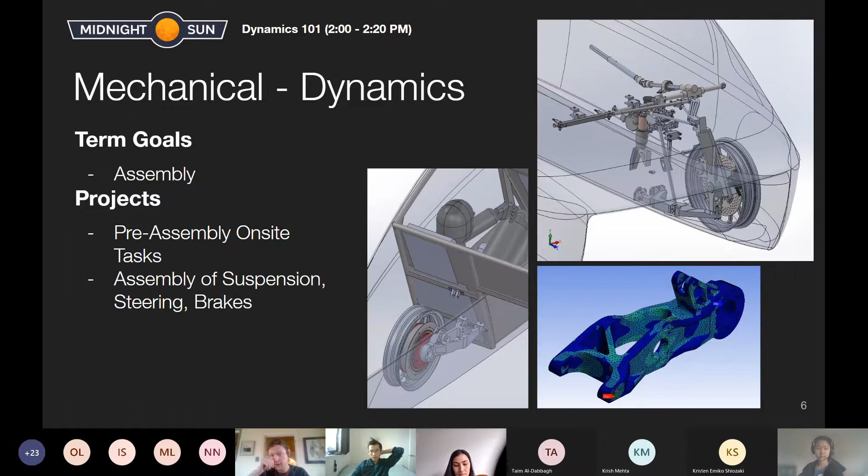I'll give a short introduction to the dynamic subsystems and what it's all about. I'll start with the suspension. The suspension of a car is just a mechanism that...

I'm not sure if it's lagging on my end. Well, I'll just keep talking and let me know if no one can understand me.

The suspension is essentially a mechanism that controls the vertical movement of the wheels. So when you're hitting bumps and stuff, you don't want all of that energy from the bump to be directly translated into the chassis and into your drivers and passengers. So you essentially have a suspension system that reduces the peak force that's exerted.

So we have springs which temporarily store energy and then re-release it, and we also have a damper which absorbs some of that energy and transfers it into heat. The spring and the damper work together to protect the drivers.

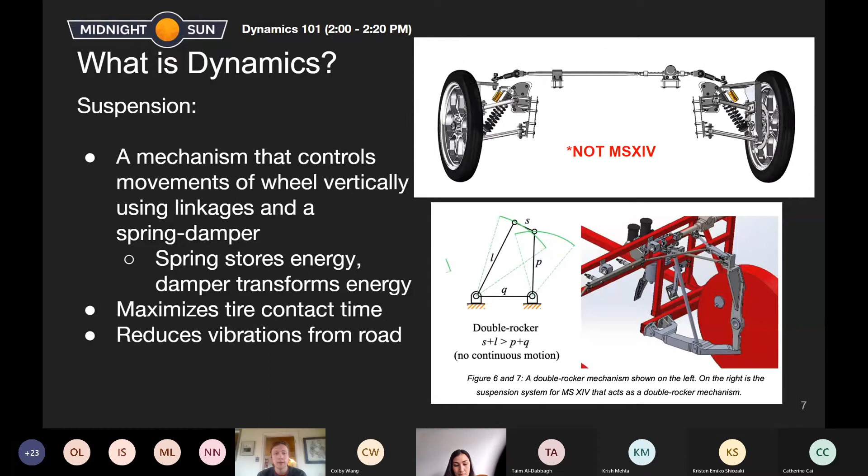Right, next slide. Once you have your suspension, which keeps the wheels on the ground, you need to be able to go where you want to go. For that, we have the steering system. Our steering system is fairly simple.

Most vehicles that you've probably driven have what's called power steering, where there's either motors or some kind of hydraulic pump assisting you to move where you want to go. We don't have any of that. So all of our steering is just based on how much force you can put into the steering wheel.

Our system - while that little animation is playing in the top right, that's not actually our vehicle, but it has quite a similar geometry in terms of the steering of our car. You can see this rack and pinion there, to the right a bit - this mechanism is essentially just converting the rotational motion of the steering wheel into linear motion, and then there's a series of linkages that connect to the wheels and turn them back and forth.

Yeah, it's fairly simple to understand in concept. In practice, getting all of the geometry right is quite difficult, and so there was a lot of work put into getting all of the angles to line up, hopefully it will assemble properly.

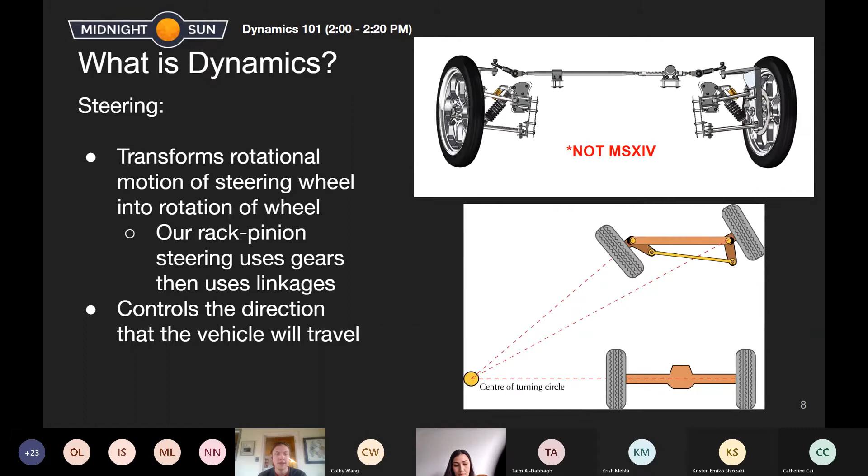And then finally, we have brakes. On our car we have two types of brakes. The main brakes for stopping the car are hydraulic. Essentially, the driver has a pedal and pushes on it, which compresses a long tube full of brake fluid. Because that fluid is incompressible, hopefully very little of the energy you put on the brake pedal goes into compressing the fluid. All of that energy gets transferred along the length of the tubing and goes all the way to your brake calipers, which are essentially just a little clamp that squeezes on a brake rotor.

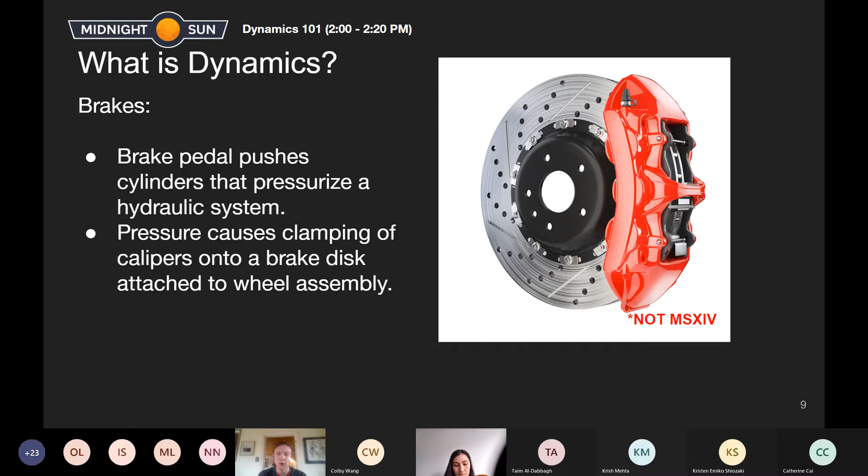This is the front suspension, and then the rear suspension is a lot simpler because you don't have any steering on the rear.

As I mentioned, we need to just finalize our plans. A lot of that is going to be in terms of making sure that the people who are on-site and ready to assemble it are very familiar with the system and how it needs to go together. And then there's also a few miscellaneous on-site tasks that need to happen before we can assemble the suspension.

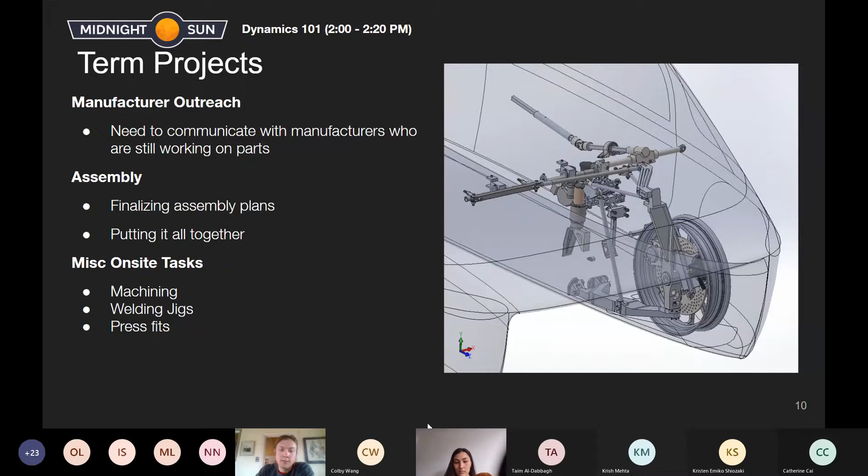And that's all for myself. I think the next slide is some of the supplier interfacing stuff. I don't think this is particularly relevant anymore to Dynamics. We still have a few relationships with companies. A large part of what we've had to do over the past couple of years is interfacing with machine shops and people able to make stuff for us and get surface finishes on parts. But a lot of that is kind of done. There will still every now and again be a few small things where we need to communicate with a company. So this is just something to keep in mind - if you're working on Dynamics, part of what you're doing may be communicating with companies, which is both a good skill for the real workforce and vital to our team.

And if you have any questions about Dynamics, feel free to ask them now.

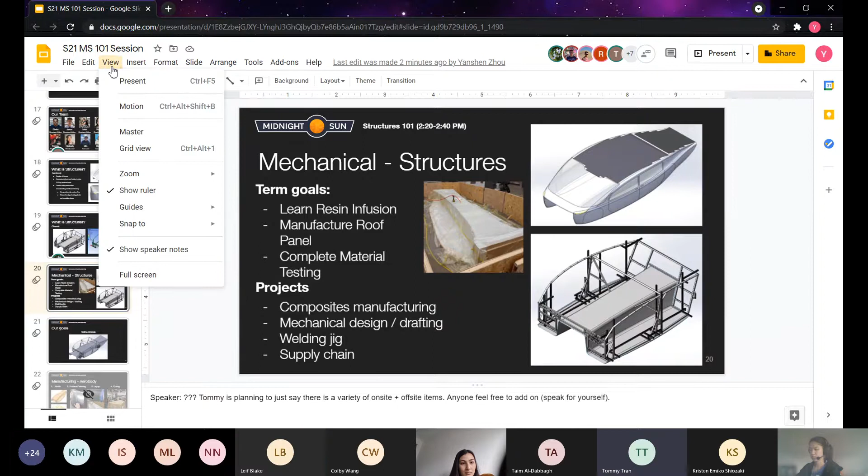Hello, my name is Tommy, and I'm the structures lead. I'm currently in 3A mechanical engineering, on my study term. Hello, I'm Kimberly, I'm the chassis lead, also in 3A Mech this term. Hello - yeah, we hear you. My name is Min, I'm in my 2B of mechatronics, and I'm the current aero body lead. Hi, I'm Michael, I'm the assistant aero body lead, I just finished my 1B nanotech eng, and I'm on co-op right now. And then we also have Catherine, who has spoken previously, but she's the project manager for structures also. I guess you can go to the next slide.

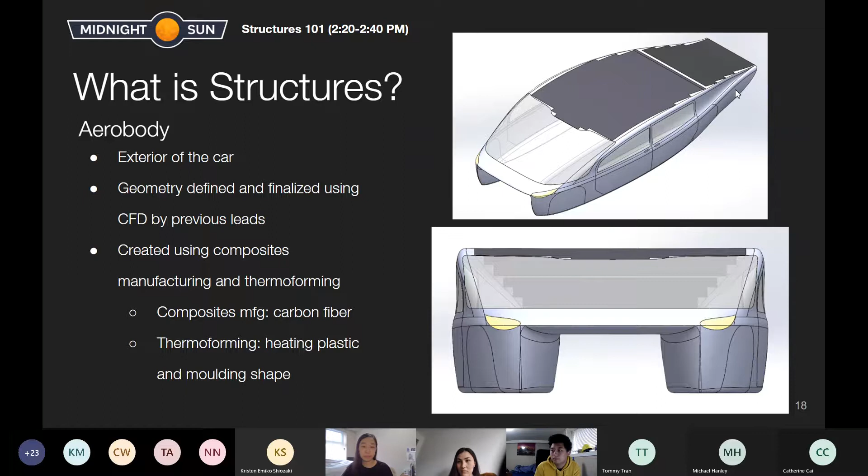Yeah, so if you're interested in doing some on-site work, there's definitely opportunities for that.

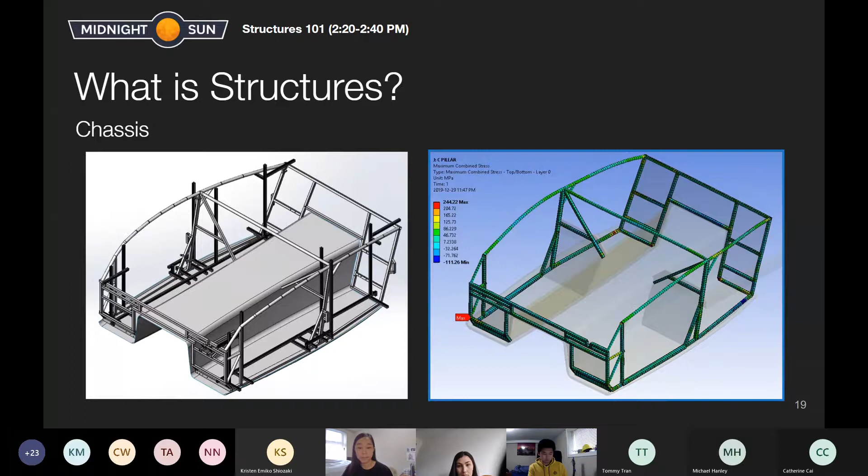This is just a quick overview of what types of projects we're running this term, or what you can think of as what is left to be done for the car. Reading through it, there's resin infusion and manufacturing the roof panel, which falls under aero body panel manufacturing, an on-site task. There's also material testing, which we'll talk about more afterwards - that's both an on-site and remote task. Each project has a remote and on-site task because there's always some aspect of research, and there are some on-site aspects for the chassis as well, as Kimberly mentioned. There's a large majority of on-site work to actually manufacture and deliver the physical product of the vehicle, so that we're trying to transfer the CAD model into a real life object for us to touch and drive.

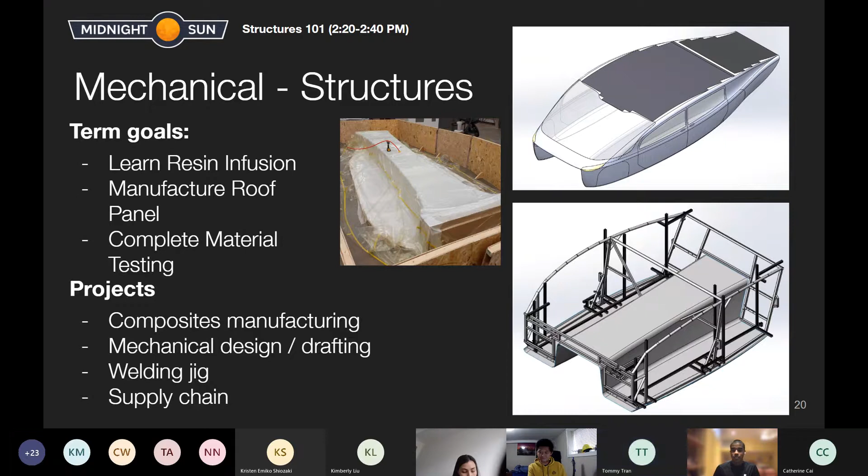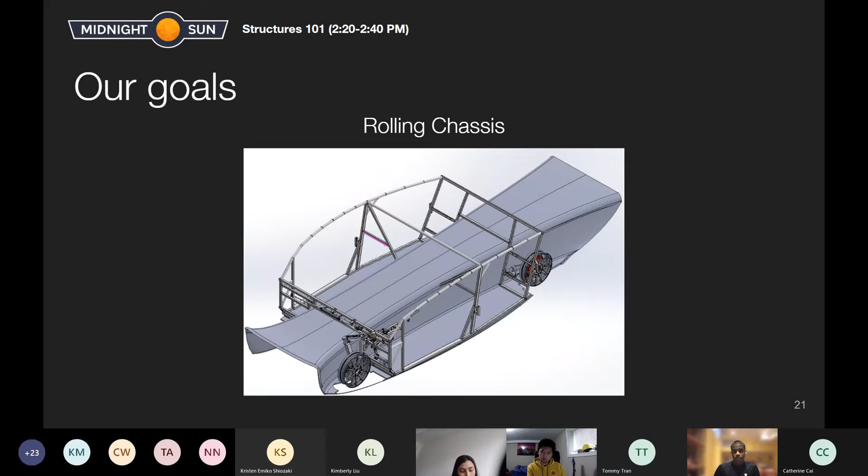I can talk about the first overarching project the Aerobody team is going to be working on. This is both remote and on-site, since there's lots of intertwining between the two, but the majority of this will be on-site in Waterloo. So what this project basically entails is that we've been using a different manufacturing technique for carbon fiber for quite a while now, and we're starting to shift our focus to try another technique.

Called resin infusion. Basically what that entails is we're going to need to do a lot of our own test pieces and testing in general, just to understand the limits of our manufacturability, because everything you read online is usually a bit more optimistic, and most people in industry have better equipment than we do. So we need to self-define our own limits of manufacturing, if that makes sense.

So the steps for that: we're currently in phase 1, which is just research and documentation. We're trying to gather all the knowledge that we can while we're not allowed in the Bay. Once we finish that, we need to make a manufacturing plan, basically detailing out exactly what needs to be done once we get on site. Then come June 2nd, hopefully, if the lockdown isn't extended, we'll be able to start doing test pieces.

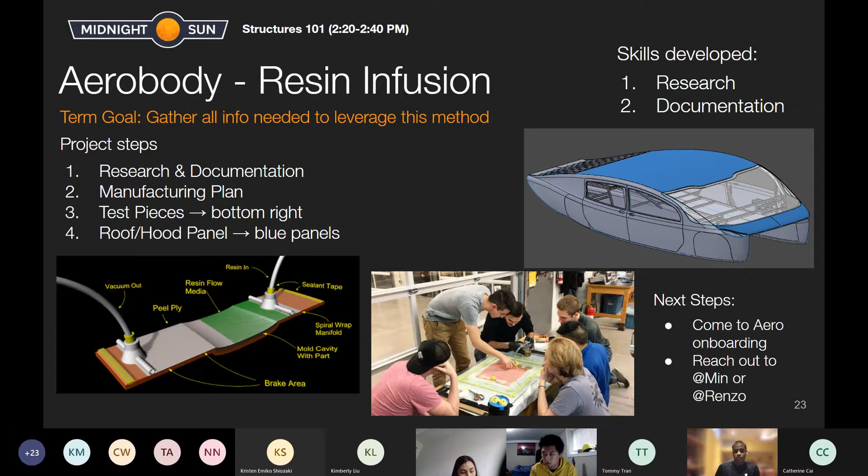So for next steps in terms of this, I'd probably just say come out to the Aerobody onboarding, and feel free to reach out to myself or Renzo, who's the interiors lead, over Slack.

Right, I'm still here. Nice.

Okay, this is our second main project for Aero. Basically we want to manufacture the roof panel. Typically, one panel would be like a third of our term goals, but what makes this panel special is that we're trying to use a new molding technique. We're basically using sheet metal as opposed to any foams or MDF, which is just a type of wood. So with this comes some design challenges, and it's a concept that's new to Midnight Sun.

The basics of it is that you use these ribs at the bottom to basically dictate the geometry of your top surface of the mold, which is that big sheet sitting on top of the vertical pieces. This is a technique we've been trying to develop under the guidance of ETS Polytechnique, which is a school in Montreal.

In terms of next steps, I think it's pretty similar: coming out to the Aerobody onboarding, as well as just reaching out to myself.

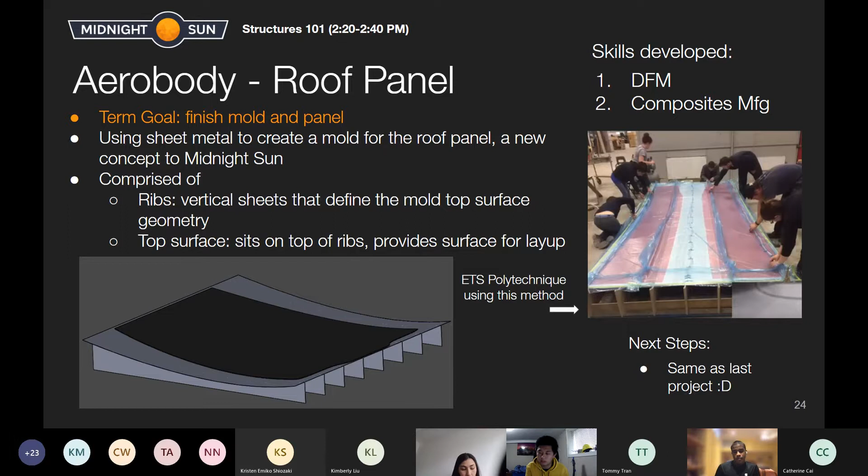My turn. So my main project here for this term is the floor panels, and again the goal is to finish. We are very much in the last stages of manufacturing. We just have to do our final preparations, and then as soon as we get back on site, it's going to be one of the first things we do in terms of composites manufacturing.

So if you see in bold, if you want to get hands-on experience fast, this project's for you. On the right, you see where the floor panels will sit - they're just flush with the chassis. There's also a special part about the floor panels: we have to integrate it with the seats, so we have to strategically plan cutouts for certain parts of the seats and give enough space for physical fastening for the seats to be bolted to the chassis.

And then hopefully, if all goes well, we will be able to integrate it with the chassis. Make sure to just reach out to me or Min whenever - I'm always open to answering questions about this kind of stuff.

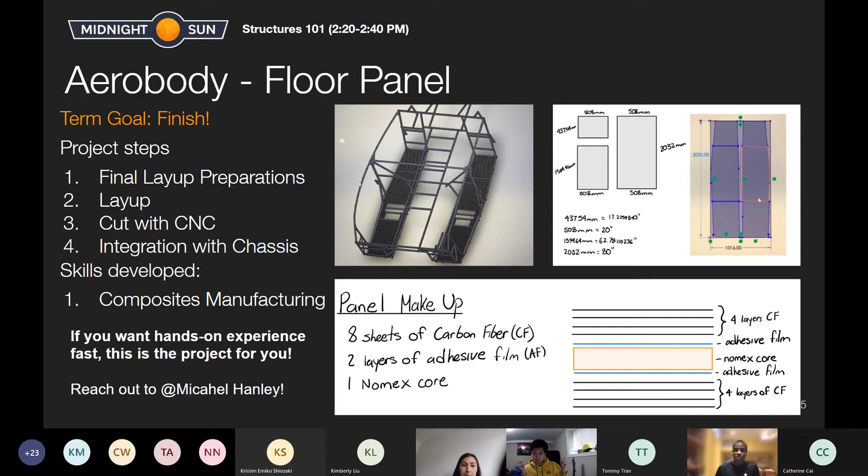Yeah, so the next project is Aero Chassis Integration. This project basically deals with the installation of all the composite body panels onto the vehicle. Currently, all the projects are remote because we're in the design and planning stage.

So key steps for this project: first, everyone goes through a research and concept development stage where they take a look at the existing CAD and figure out what kind of mounting method would work best for that panel. After that, they do some CAD design and fixture design just to make sure that everything fits properly and there's no interference.

It would also require doing some calculations in FEA. So as you can see there, that's one of the tabs that we're planning to use for the roof panel integration. We would need to validate some loading conditions for that.

Another really critical aspect to these projects are the manufacturing plans. Since we're going to be carrying out this integration on site ourselves, it's really important that we are creating designs that will work for us and aren't too difficult to put together. Being able to design mounts that are manufacturable in-house and things that we can assemble are really important.

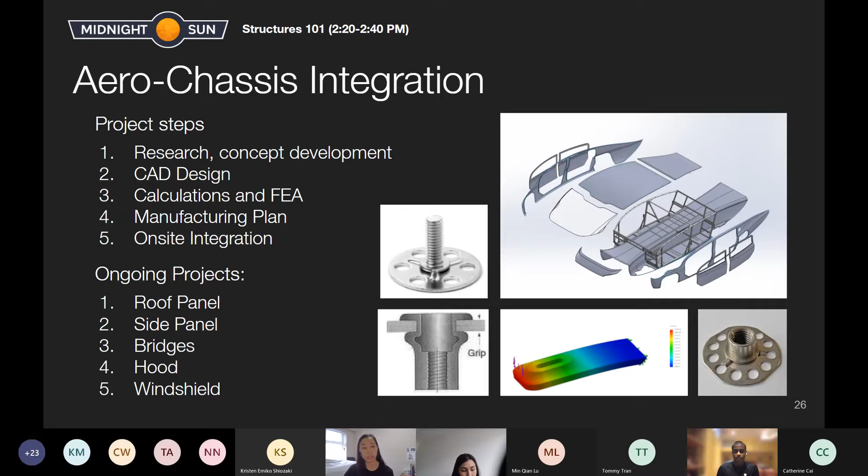Hello, it's me, Tommy. So here I'd like to talk about the material testing project.

The term goal for this is mostly to complete the general testing related to the car. And what I mean by general would be elements that repeatedly show up on the car, so that would include composite panels, adhesive joints. Those are the common ones.

So if you have a general procedure, you can just copy and paste it for each individual panel that we have.

But anyways, in terms of what you kind of get out of this project is, I guess, how we kind of approach finishing this. The first step would have to do with researching and doing a test plan.

Secondly, we would have to do on-site testing. Thirdly, we'd also like to do some simulation to see how similarly the actual pieces perform and how we hope for them to perform based on design. And then lastly, it would be writing a test report so that we can calculate and share our results.

I guess the best way for you to really get an idea of what this process is like, it's very similar to a lab that you do during your courses. We're basically trying to be professors or TAs, trying to set up these labs so that we can run them and then write a proper report related to them.

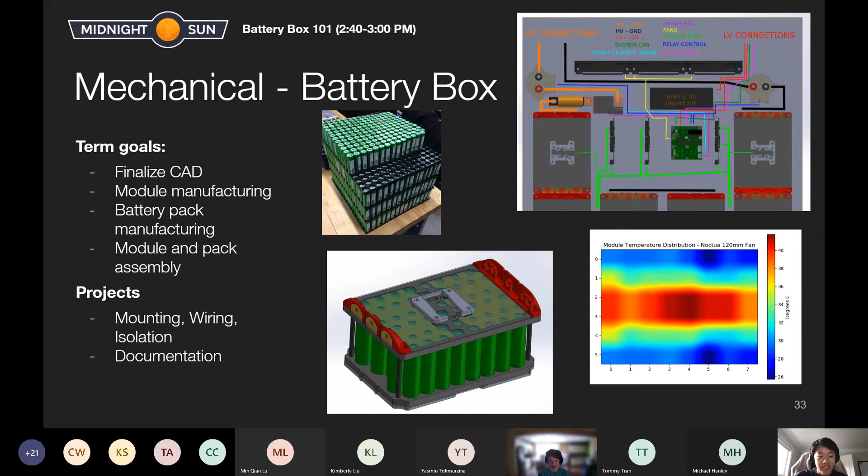Okay, cool, next slide. So the battery box in the car is one of the most important components, in my humble opinion. It provides a source of energy storage in the car in order to run our motors and store the energy we collect from the solar panels.

Although putting all this energy inside a box can be dangerous, there are definitely safety concerns we need to pay attention to, such as thermal runaway or explosions. We are dealing with high voltage inside the battery pack, so I'll talk through a few safety concerns later. There's reliability we need to consider - we need this battery pack to run reliably throughout all our testing and competitions. We also need to make it manufacturable. A lot of the other teams have been talking about manufacturing methods, and that's no different for us.

We need to be able to manufacture the battery pack, and a lot of equipment is sometimes fairly specialized for battery pack manufacturing, and because of that it's sometimes expensive. So we have to come up with other ways of doing that, such as spot welding, which is one consideration we've had in the past. That's fairly different from most other manufacturing methods you sometimes see for batteries.

On the right side, you can see a picture of the electrical boxes inside our car. This has changed a little bit, and this is kind of an old diagram, but to give you a general idea, our battery box sits in the middle between the front passengers, and we'll have a rear electronics enclosure between the rear passengers. Our motor controllers and motors will be in the rear of the vehicle behind the passengers, and we'll have other electronics boards up at the front of the car that have the driver controls and some more front power distribution for the lights and other items like that. We can head to the next slide.

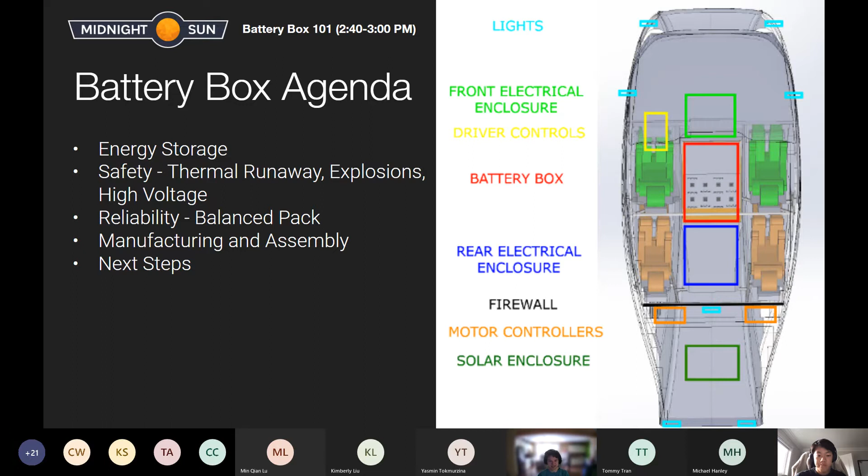So for the battery pack, it's split up into 3 levels of energy storage, and at least that's the simplest way I can think to present it. There's the cell level, which is the smallest unit of energy storage you can purchase from the manufacturer. Some of you may have heard the terms 18650 or 21700, or maybe now Tesla's 4680 batteries - that's the smallest unit of storage you can get from the manufacturer. For our car, we're using 18650 style battery cells, specifically the LG MJ1 model, which are fairly high capacity and high energy density. I'll get into those terms a bit later.

Once you assemble all the cells together, you put them into what's called the module, which is the smallest removable unit inside your battery pack. In our modules, we have 50 cells each, and we attach it to the car with 6 bolts for the mechanical and electrical connection to the other modules in the battery pack. Once we have all our modules assembled together, that's called a pack. We have 18 modules in our battery pack, making up all 11 kilowatt hours of battery storage in Midnight Sun 14.

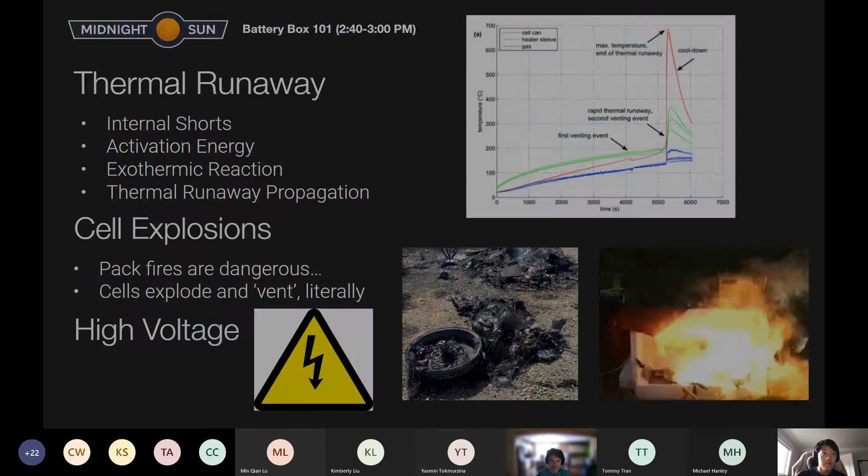Onto the cooling system a little bit more. Everything produces heat during normal operation—it's not just thermal events that create heat. As we're cruising down the highway or through testing, the batteries are going to generate heat, partially due to the internal resistance inside the cell. If you remember the Randles model from a few slides back, there's an RS, the series resistance, that will create heat as current flows across it.

We've got an electronic load, which we use to draw current from the battery module, and a few power supplies that we use to charge it back up. We connected it all to a computer to log the temperature as we were discharging the battery module, and from that data we were able to create this temperature map inside the battery module. You can see in the center, this is kind of like a top-down view of the battery module.

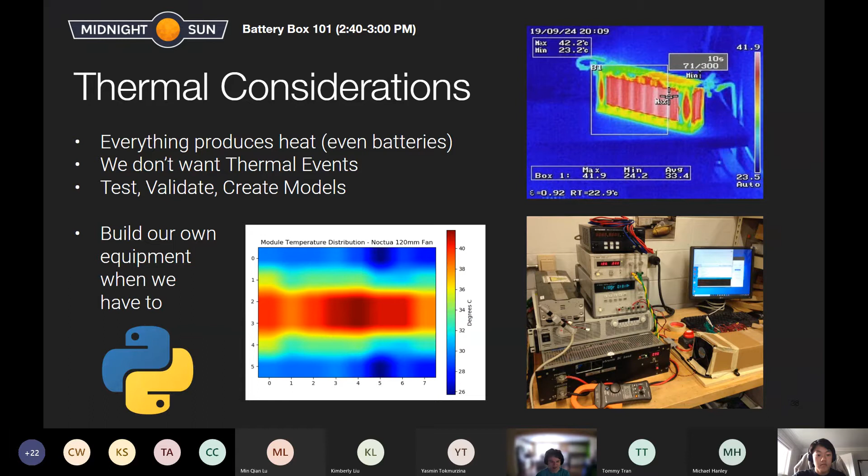This is kind of jumping around a bit here, so if you have any questions, just let me know. I'm just trying to cover a bunch of terms that you'll often hear so you aren't super confused when you jump into a battery team. You'll often hear the term a balanced battery pack, and so I'll try and explain that a bit here.

Each cell will have different characteristics. So some cells might be able to hold more energy than another cell. And that's true even within the same manufacturing batch of the same model. There's always variation in any manufacturing process. So we want to ensure that all of our cells have the same energy capacity, or at least have some way of dealing with cells that might have a different amount of energy storage.

But the problem with having cells at different levels of energy storage is that as you charge it up, cells that store a lower amount of energy are going to charge faster, and they're going to reach full charge first. Full charge will be a 4.2 volt cell, and we don't want to exceed that, as higher voltages will cause extra stress on the crystal structure inside the cells, which will lead to internal shorts quicker. But we're limited to a maximum voltage, so those cells that have lower capacity, lower energy storage, will charge up faster and reach that voltage.

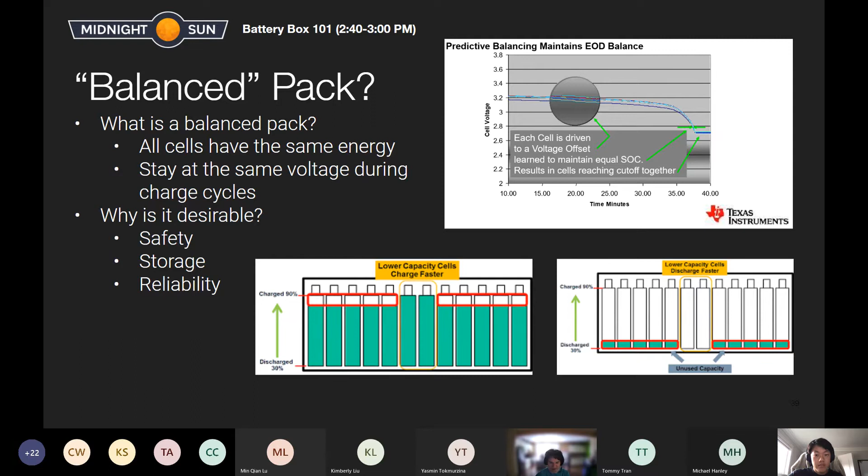So it's great for safety, great for storage, and great for reliability. Let's go ahead to the next slide.

Obviously the battery pack is a fairly complicated piece of design, as with all the other designs on the team. There's multiple different design techniques that we use to do it. It's a little bit of a unique challenge given that we're manufacturing 18 battery modules, and most of the other parts in the car we're just making 1 or 2. So through the module design, we've thought a lot about how we're actually going to manufacture it and assemble it.

So we use lots of techniques for low volume manufacturing, like 3D printing, laser cutting, water jet cutting, CNC machining. We've done each of those on this battery pack design. And moving forward, we are going to be designing the rest of the battery pack mounts, and lots of those are going to be 3D printed. Yeah, so thanks for listening. If you have any questions, that would be a great time to ask them.

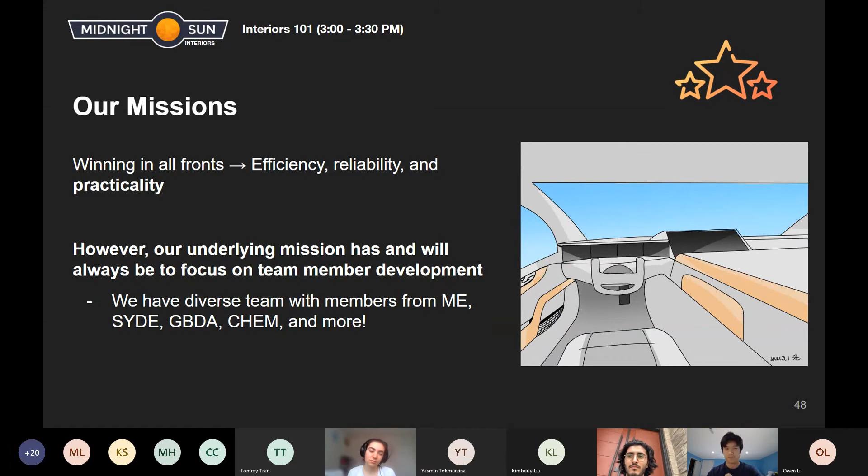So what is the purpose of interiors? Our mission is to win on all fronts in terms of efficiency, reliability, and practicality. However, just like the main mission of Midnight Sun as a whole is to focus on team member development, we make sure everyone who's part of interiors, or the whole team, has the opportunity to improve their skills and be the best they can be.

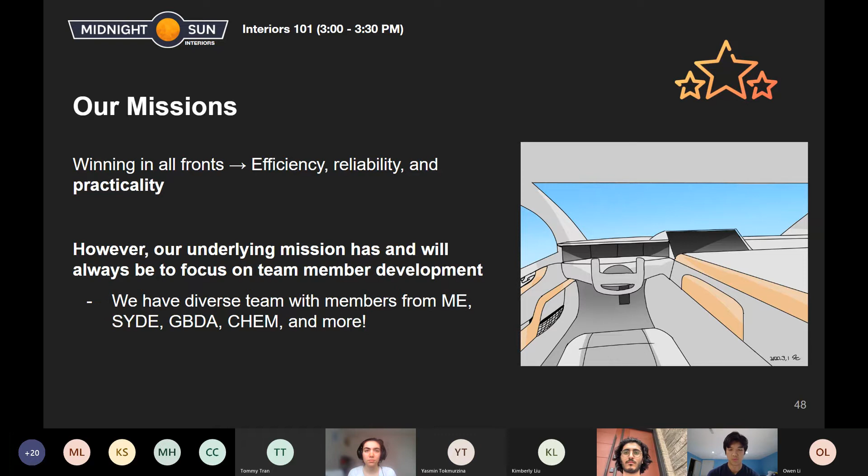Interiors is quite a new team. The past cars that Midnight Sun has produced did not have a dedicated interiors team or plan, since those cars were mostly one-seaters, with the exception of our previous car, MS-12, which was a two-seater. But even for that car, the interior wasn't emphasized as much as we are emphasizing it for MS-14. That image there was made a while back—one of the concepts for the interior—and that's what we're trying to work towards for this car.

Next slide, please. I also forgot to mention that this team is very diverse—we have a bunch of people from different programs, different faculties even, and skill sets. So it's a very wide range of interests and skills on this team.

So what do we do? Interiors is also a part of mechanical, but what we do is everything that's not part of the mechanical system—anything inside the car that interacts with the users is our domain. So everything from ergonomics to ventilation to material selection, aesthetics, composites manufacturing. If you were here during the aero session, aero and interiors will be working together quite a bit because a lot of our manufacturing plans overlap, so we're going to be merging our powers this term. That's basically what we do.

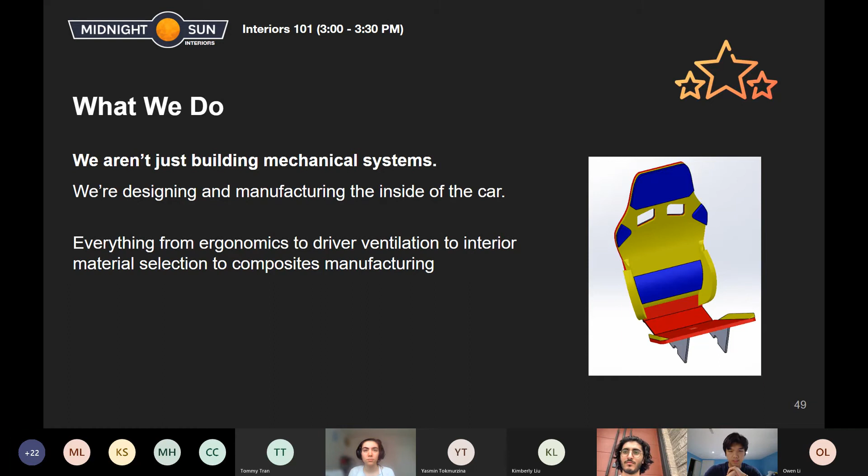Next slide. Big question: why do we need an interiors team, or why have one at all? It's pretty straightforward—if the people sitting in your car aren't comfortable, then it's not really a car, it's just a showpiece. That's probably the biggest reason why we're emphasizing interior design for MS-14.

As you can see in the left image, that's a photo from the interior of MS-12, the previous car. Apologies if it looks messy—this was after competition when they were taking it down, so it looked cleaner than that normally.

This interior was put together very last minute, so there wasn't much planning done beforehand. As you can see, you can see bits of chassis, bits of wires, and other things that would normally be covered up in a commercial car. So our goal for MS-14 is to build on this first trial that MS-12 had and make it even better, so it looks more like the one on the right, which is Eindhoven's car—a solar car team in the Netherlands that's been winning everything recently.

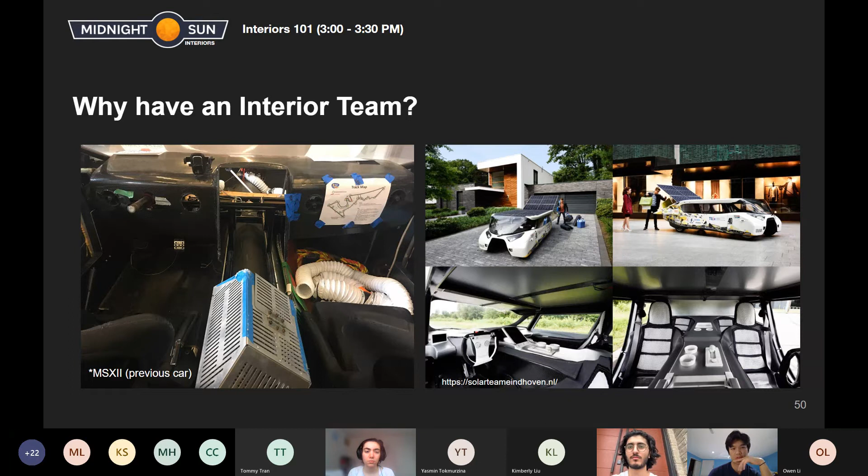So, and you can see why, because their car is pretty sleek, and they've also put a lot of effort and emphasis on their interior because it actually looks like something you want to sit in. So yeah, that is sort of the main goal we're trying to strive towards with this car. Next slide.

Interiors itself is mainly or completely responsible for the P variable, so practicality. And so that basically entails how attractive and reliable the interior is. Like, does it make people want to sit in it? Is it comfortable for people sitting in it? And everything like that.

So the breakdown for practicality is, I should also say that the practicality score itself is probably the most subjective of the scoring. It's probably the most subjective score of the entire competition, because you can't really put hard metrics on how comfy the seats are, right?

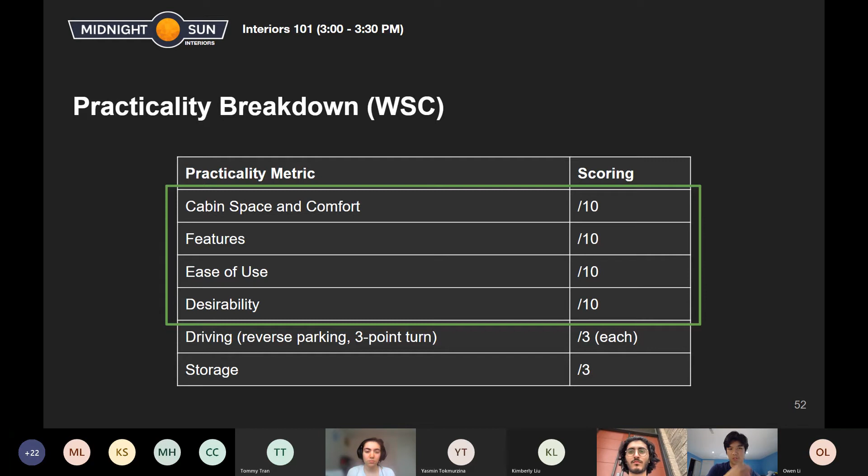And then you have driving, which is not our focus, we're not dealing with that. And then storage, obviously. And I should say too that these metrics are probably open to change, and it's all up to the scrutineers. I don't want to say opinion, but whatever they want to emphasize, they'll score on. So this might not be the final rubric, for lack of a better word. So next slide.

Interiors is very spread out in that we are dealing with projects that interface with both mechanical and electrical as well. So if you decide to join this team, then you'll get a lot of opportunities to communicate with different people on different sub-teams to get more knowledge for whatever project you're working on.

So manufacturing is the catamaran cover, the seats, and the doors. So I'll give a brief rundown on catamaran cover. So basically, if you were listening to Michael, Black, and Owen's talk previously, this will house the battery pack and all the accompanying electronics in the car.

It will be a full fiberglass enclosure, which will sit down the middle of the car on the catamaran, which is the shape of this car—it sort of resembles a catamaran boat where there's like a giant empty space down the middle. And this will sit on top of those chassis tubes that go down the center of the car. And basically, this is a support project to Battery Box, in that the main goals here are safety and...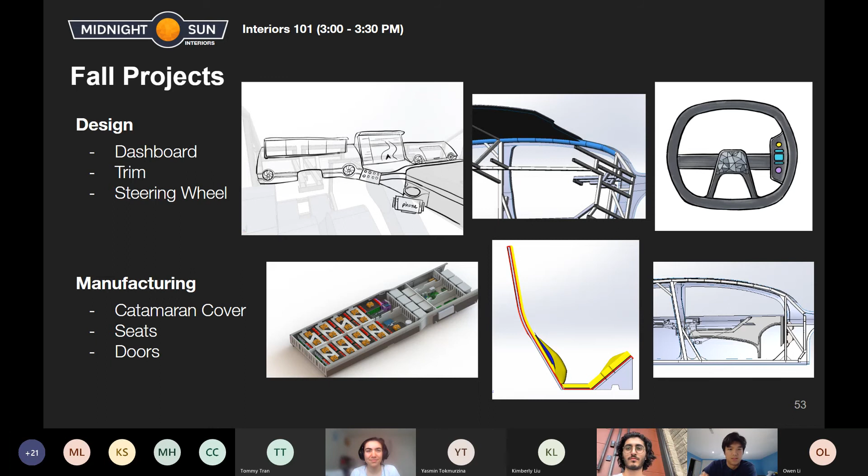But that's pretty much all our projects. Next slide. Sheila, do you want to explain this?

And then in general, there's a couple of design logs in there and process of design for all of our projects. Check that out if you're interested. I think it gives a good overview of where the projects are and how they came to be at that point. We use a lot of SolidWorks, as probably you can infer.

So right now, for seats at least, we are in the FEA process. So we are doing a lot of simulations and hand calculations for side collisions and rear collisions, and any sort of ballast or person flying through the air, just making sure that the person is safe, because that's super important.